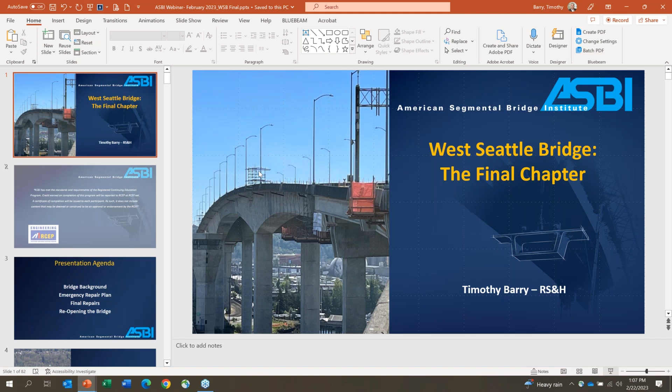Before I get started, this project, the West Seattle Bridge repair, I know has been talked about quite a bit inside ASBI over the last three or four years, with everything that's gone into this project and happened to the bridge. So the presentation today is really about telling the final story, how we were able to get the bridge reopened, and the efforts to get that accomplished.

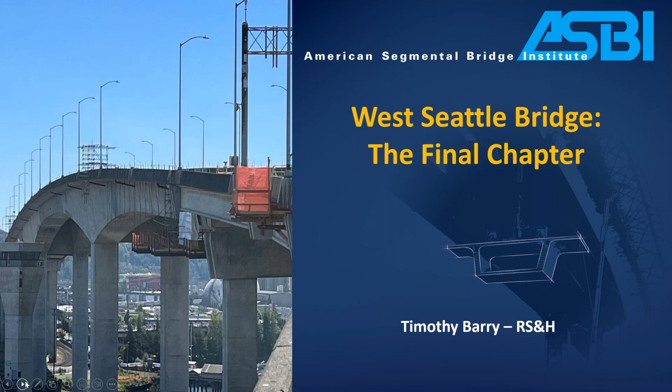Some of you might be new to the project and not know about it, so we're going to talk about the background of the bridge, what the initial emergency repair plan was when we first ran into difficulties, and then really focus on what I call the final repair project, which occurred basically most of last year, 2022, and how we were able to reopen the bridge.

A little bit of background: this is the West Seattle Bridge, opened in 1984. It crosses the Duwamish River in Seattle and connects the community of West Seattle, which is really the only connection of that community to the rest of the city. The bridge is owned by the Seattle Department of Transportation, and the three main spans, the ones we unfortunately had issues with, are cast-in-place balanced cantilever. The entire corridor is roughly 5,600 feet and carries 7 lanes, but we're going to focus only on the main span unit, the 3 spans in the center.

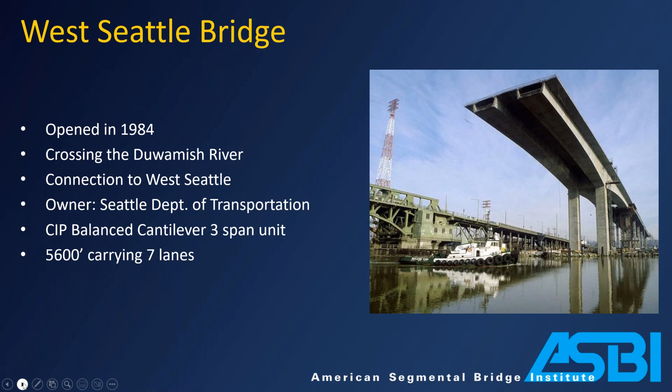I mentioned West Seattle—in this photo outlined in red is the community of West Seattle, with roughly 82,000 people, a significant portion of the city of Seattle. The dark red line is the West Seattle Bridge, basically the main connection point between that community and downtown Seattle and the rest of the city proper. This bridge is known as one of, if not the most, utilized pieces of infrastructure in the city of Seattle. It's important to commuters, businesses, and emergency services. When under operation, it carries 100,000 vehicles per day and 25,000 transit users per day—a very significant piece of infrastructure.

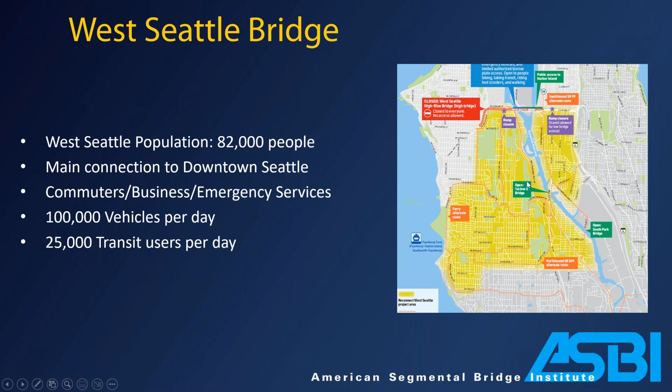This picture, though hard to see, shows the detours required when the bridge was shut down. Up at the top is where the bridge crossing is, and the next furthest south crossing of the Duwamish River is quite a ways away. What this doesn't illustrate is that this is a very much urban residential area—2-lane roads, on-street parking, a lot of traffic signals, and 25-mile-per-hour roadways—definitely not conducive for 100,000 vehicles per day. So the inconvenience to this community really cannot be overstated when the bridge is closed.

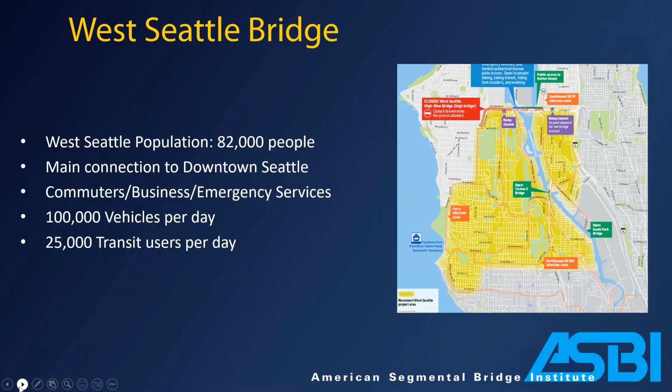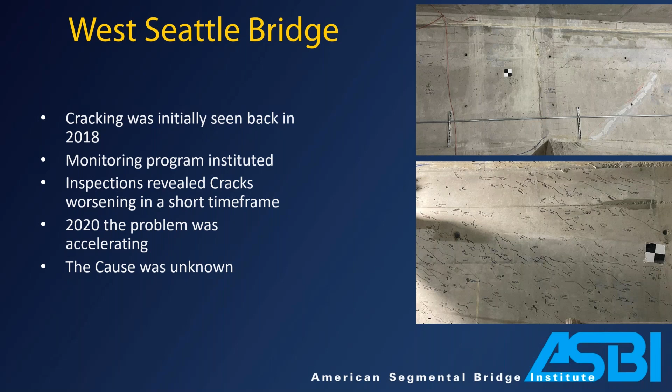So speaking of closing the bridge, what happened, how did we get to that point? Going back to 2018, some cracking was originally observed in the web walls and floors of the bridge. It wasn't overly concerning at first, but it was noted that it needed to be monitored more closely. As inspections progressed over the next couple of years, the cracks were getting worse, and worse over a shorter and shorter time frame. In 2020, it was noticed the problem was accelerating pretty significantly, and the alarming part was the cause was unknown.

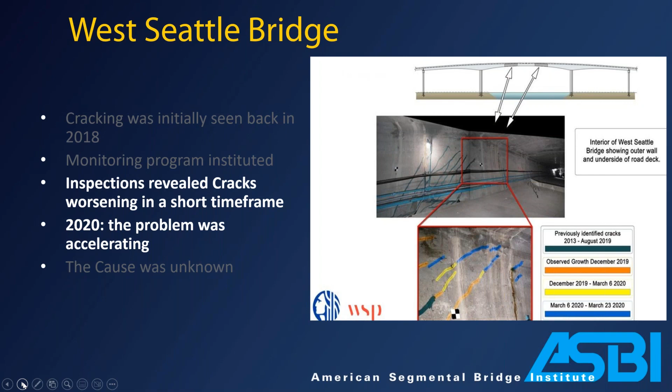This shows a good indication of the worsening in a short time frame. In green were cracks identified between 2013 and 2019. In orange, observed again in December 2019—only about 4 or 5 months later. In yellow, between December and March 6th, 2020—only 3 months. And in blue, between March 6th and March 23rd—less than 3 weeks, that's the additional cracking seen. This is when the alarms started going off that there was a serious problem needing further investigation. This is actually a memo from the engineers monitoring the bridge saying they couldn't model the cracking at the time they were seeing it.

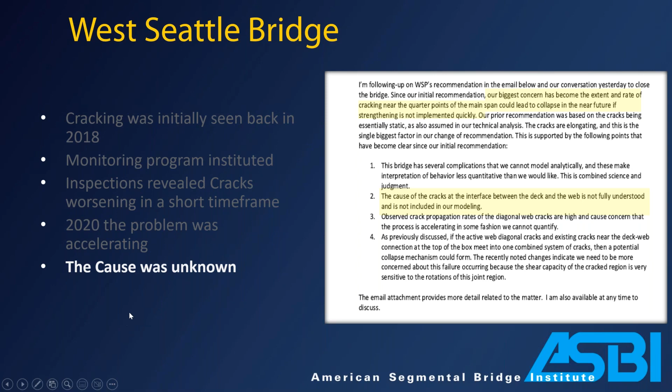Cracks were getting worse, exponentially worse, in a short period of time, and the cause couldn't be determined. So there really was no choice, they had to close the bridge for safety reasons. That happened on March 23rd, 2020. The bridge was closed, causing a major inconvenience to the city of Seattle.

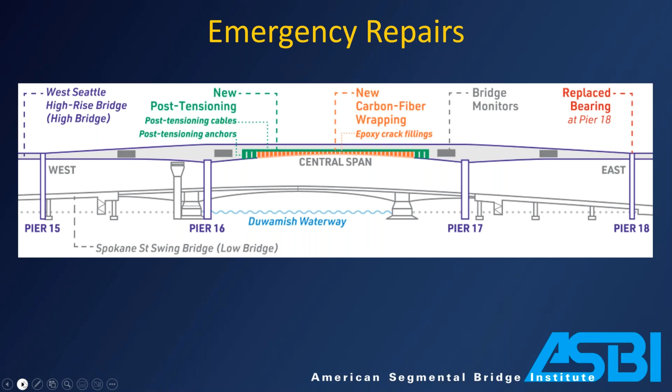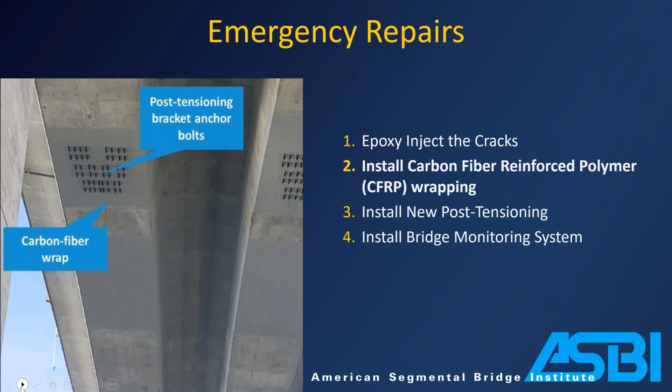The initial response after the closure was to do a very quick emergency repair, basically to stop the cracking and stabilize the structure after traffic had been removed. It was really three phases: install carbon fiber wrapping in the main span, install new post-tensioning, and do epoxy injection of some of the cracks, not all of them, but certainly some. These steel blocks were essentially the makeshift anchors they were able to install for the added post-tension.

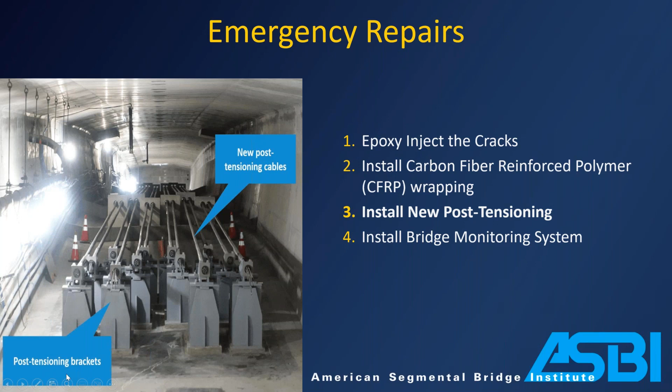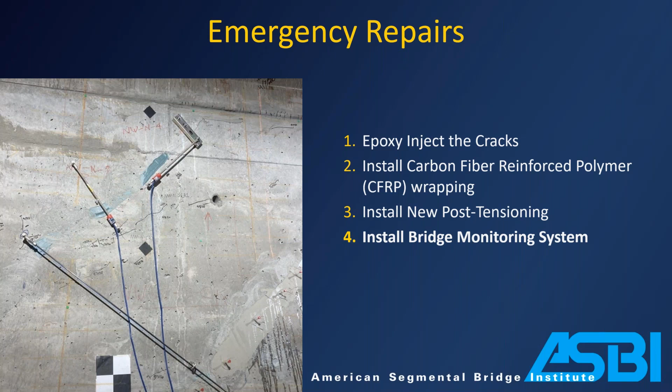A very important piece of the emergency repairs was installing this bridge monitoring system, a series of strain gauges, electronics, and even cameras, so they could monitor the bridge in real time and see what was going on. That was useful at the time, useful during the final repairs, and it'll remain in place for the rest of the bridge's life.

After the emergency repairs stabilized things, a decision needed to be made: is this bridge savable? Does it need to be repaired or replaced, or can it be repaired? A lot of thought went into this, and a panel of experts was assembled to look at it. Finally, after a lot of discussion and meetings, it was determined that yes, a repair could be developed and designed. That was the step forward for the Seattle Department of Transportation.

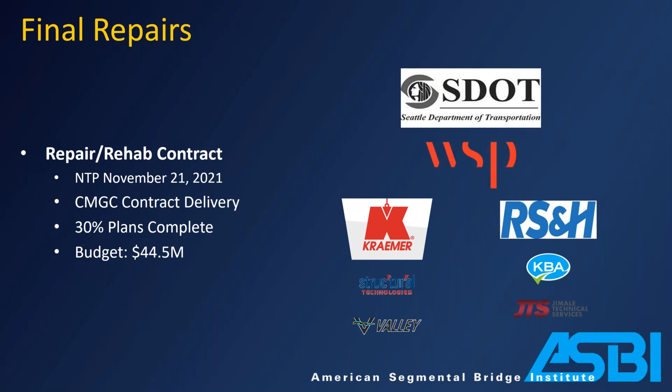NTP for the project was November 21st, 2021. The CMGC contractor was Kraemer North America, with two major subs, Structural Technologies and Valley Electric. The EOR already on board was WSP for SDOT. They also selected a construction management firm, RS&H, with subs KBA and JTS. At that time we had about 30% plans and a budget of roughly $45 million.

One thing recognized was that with a completely closed corridor needed to repair this bridge, there was an opportunity to do some maintenance as well. With the corridor closed and no traffic to deal with, they decided to do maintenance on the rest of the bridges, besides the segmental, which were also more than 40 years old and in need of attention.

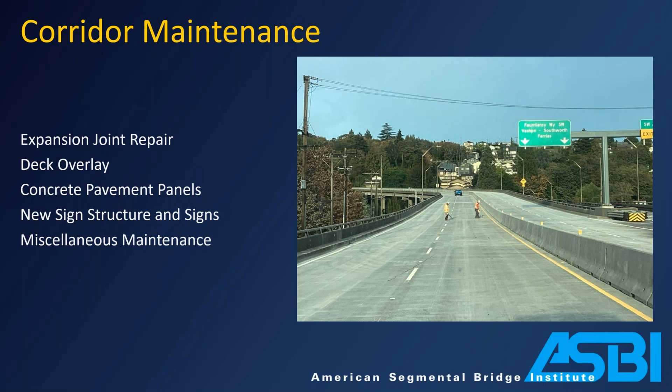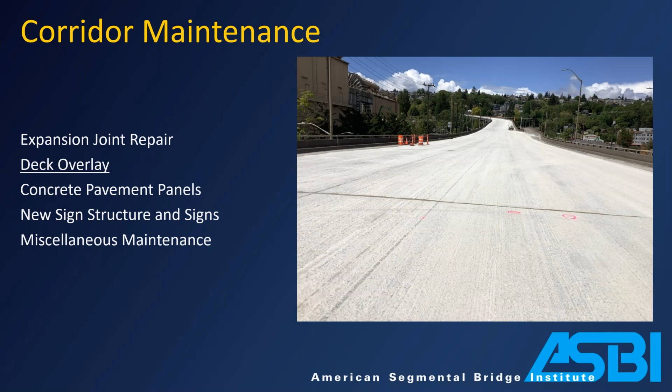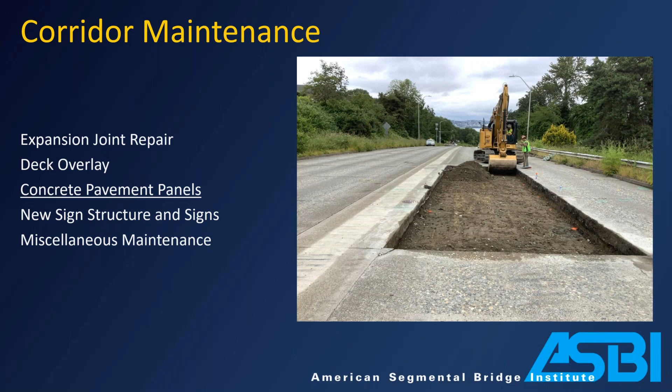They were able to repair some joints, all over the bridge, not just the segmental portion. They did a much-needed deck overlay on a good portion of the approach spans. On the far western side of the West Seattle side, there's concrete pavement, and they ended up replacing roughly 90 different panels. There were also new signs, new overhead sign structures, and a lot of miscellaneous maintenance, since this was a pretty unique situation—a corridor that hadn't been driven on for over a year, so a lot needed to be done to get it back into drivable condition.

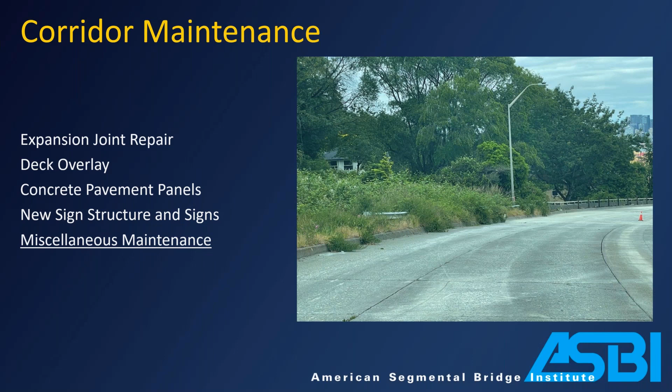Then, unfortunately though not a unique problem, it was discovered shortly after the corridor was closed that all of the copper wiring for the entire lighting system of the corridor had been stolen. They don't really know when it happened, but it was determined shortly after.

So this was something that obviously had to be added to the scope. They needed to rewire all the lighting on the bridge. Something else fun to deal with that I'm sure many people on this webinar have experienced.

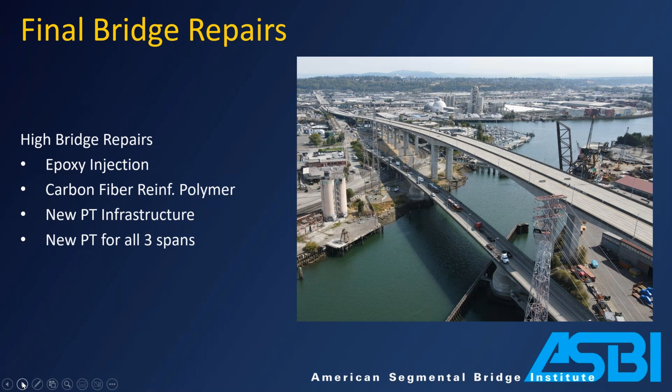So the final bridge repairs, as we enter into this, really broke down to three main parts of the scope, besides the maintenance that I mentioned. Number one, epoxy injection of the cracks. It would be impossible to epoxy inject all of them, so just a select number needed to be injected. Some carbon fiber reinforced polymer wrapping at strategic points of the structure, and new post-tensioning infrastructure, which we'll get into a lot more detail on a little bit later on.

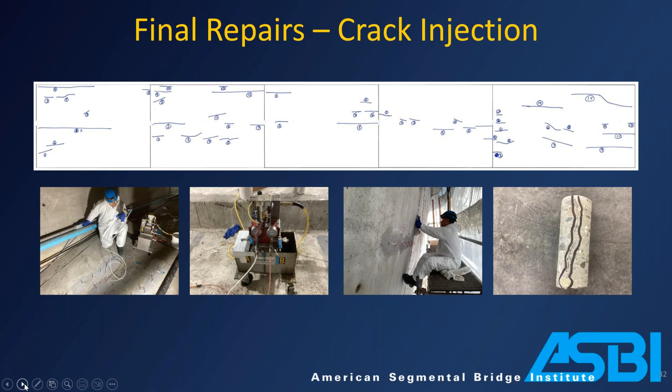For the crack injection, again, it'd be impossible to get all the cracks, so a process was set up where the EOR would come out and identify the cracks that should be injected, the ones most appropriate and most critical. They'd identify the cracks, and the contractor would come in behind and do the injection. It was really good teamwork among all the players involved to get this done quickly. All told, we ended up injecting roughly 13,000 linear feet of cracks in the structure.

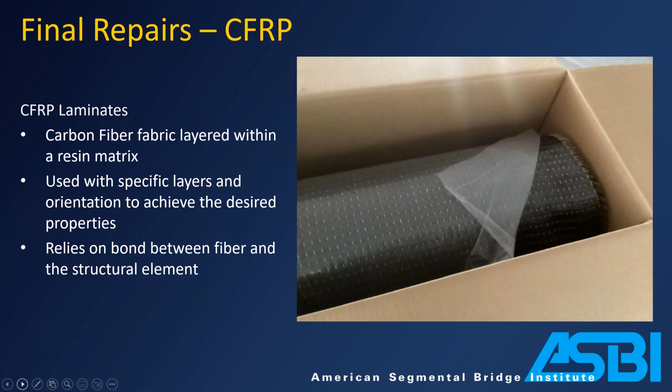For the carbon fiber, this again was a strategic use of this technology, using carbon fiber laminate. For those not familiar with it, it's really good material for repairs, for strategic points where you can bolster and increase the reinforcement of the structure itself.

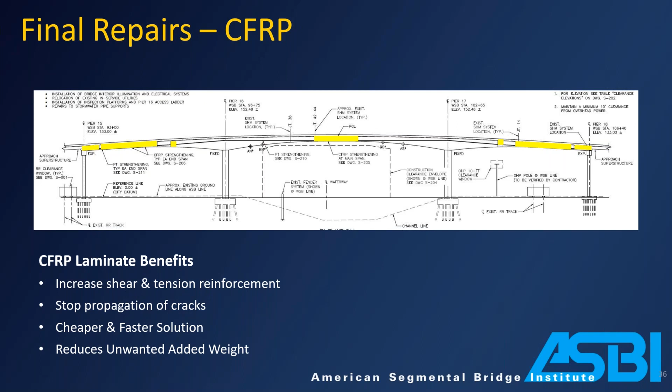There's a couple reasons why this was used. One, it's relatively easy to install - you don't need heavy equipment, and it's not really that difficult. Another thing is you got a lot of beneficial use out of this material without adding a lot of extra weight to the structure. We're already dealing with a structure having major structural problems, so using carbon fiber wrapping was a really good solution.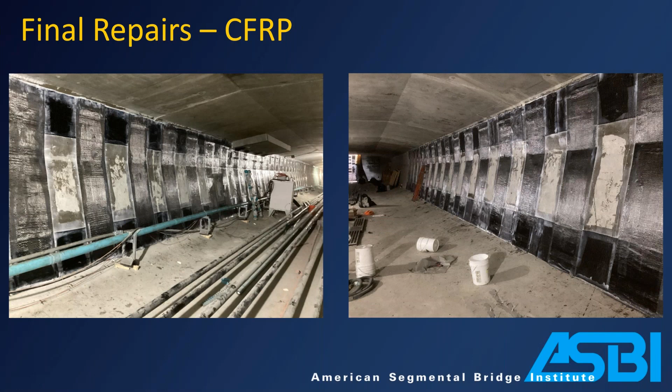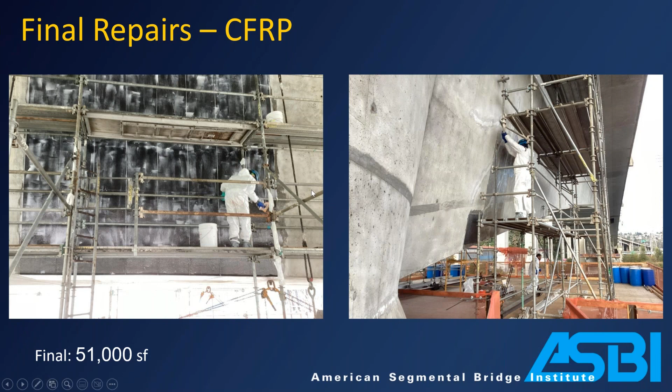You can see in these photos the application, obviously inside the bridge. You'll see the carbon fiber wrapping running in two directions, both horizontally along the web wall and vertically. Depending on how the fibers are oriented, it provides different force resistance and different applications. Here you can see it on the exterior of the bridge as well. All told, when we were complete, we had roughly 51,000 square feet of carbon fiber wrapping on this project.

As you can see from the pictures, and anybody who's ever seen this bridge knows, the biggest challenge for both the epoxy injection and the carbon fiber was access. This is an incredibly tall bridge. It crosses over a channel, it crosses over rail lines. Not very easy to access, especially since all exterior surfaces of the box had to have carbon fiber and epoxy injection done. So the solution the contractor came up with actually worked fantastic.

These inspection platforms were hung from the structure, and they were mobile as well. They had a pretty simple winch system set up on top of the deck, and they were able to move these platforms up and down the entire span to wherever they needed to go.

That was really important because of the locations of the cracking and carbon fiber - you had to be able to move quickly, but also have a crew work relatively efficiently. Just using a bucket truck would be fine, but you'd constantly be moving it, you can only get 2 people in it max, you don't have room to work, and it would be a lot of extra steps. With this, you can put the entire crew, all their equipment, and everything on the platform, and it's mobile.

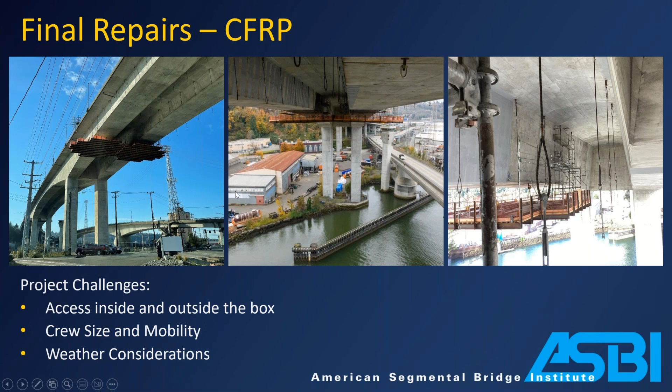Another thing is weather considerations. Anybody who's spent time in Seattle in the late winter and fall knows weather is always a problem - you're always going to have rain and cooler temperatures. With these inspection platforms, they were able to encase them with plastic, and through the use of heaters, had perfectly viable working conditions inside the structure so the entire crew could work with all their equipment, maintaining environmental conditions necessary for the application. This was a great use of these inspection platforms to accomplish this work.

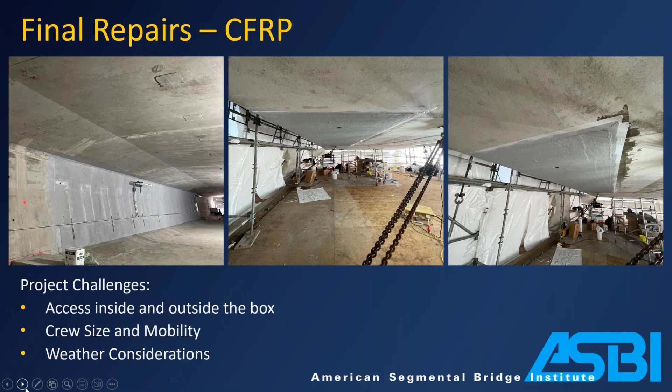Anybody who's ever done any sort of bridge rehab or repair job knows that as soon as you get in there, you really just don't know what you're going to have until you start opening things up. The plan is great and everything can be planned out as best you can, but until you get in there and see what you're dealing with, you just don't know.

In this bridge in particular, because of some of the difficulties we faced installing this post-tensioning, we had to core the existing structure. There were 32 locations where we had to do 17-foot long, 6-inch cores to install these tendons, and 8 locations where we had to do 6-foot long, 6-inch cores. So that alone is incredibly difficult to accomplish.

This is, again, an existing structure. We had to core through diaphragm walls that had reinforcing steel and existing post-tensioning from the original design. And of course, nothing is where it's supposed to be according to the original plans. So it was a constant battle trying to find where we could actually get this core in to do the minimal amount of damage to the existing structure.

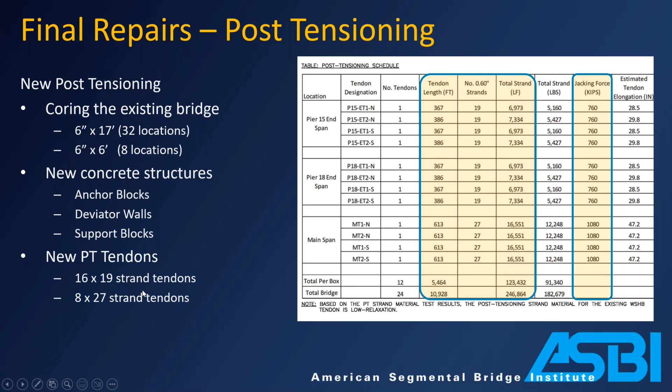So with the coring, those of us involved with post-tensioning know that the location of the anchor and the path of the tendons is incredibly important. That's what provides the forces you need for the design. So where these cores were located was incredibly important. As per the original design, we had an exact location where these cores needed to be.

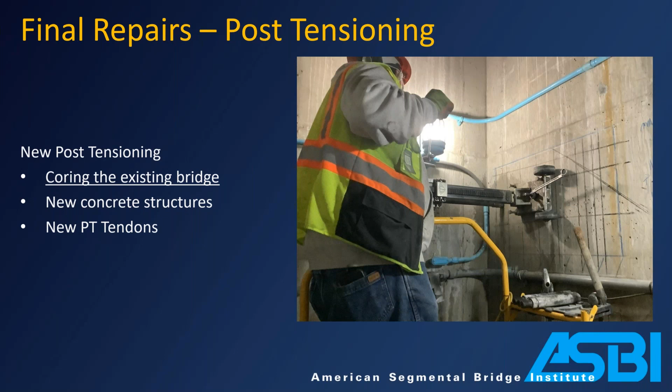However, the first step of coring was a GPR scan. We had to get in there and GPR scan where these cores were going to go, to avoid as much of the existing reinforcing steel as we could, and avoid all of the existing post-tensioning. What we found is where the cores were supposed to be wasn't going to work. There were too many things in the way.

So then the core location would have to move. And of course, once you move that location, your anchor head moves slightly, your path might be a little different. So every time you change just a little bit of the core location, it's going to affect that entire tendon, and affect the anchor on the other side. So you end up chasing your tail a little bit - we need to move it here, well what does that do to the other side, if we move it back over here then it moves this. This was a very tedious, iterative process to get completed.

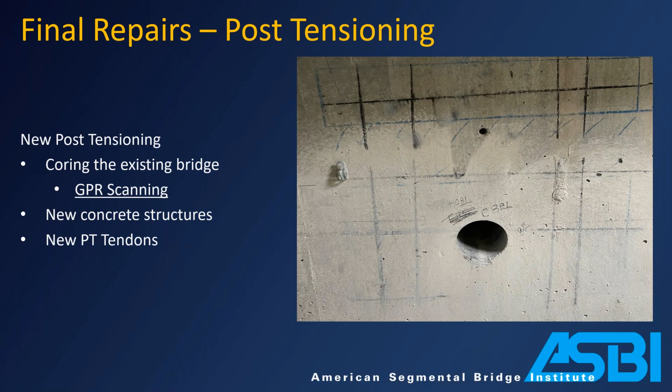So the next step after the GPR scanning was to do the cores themselves. I will say the contractor did a great job maintaining the location within a pretty tight tolerance. A 17-foot long, 6-inch core is pretty difficult to achieve, and to make sure you stay within an inch or so tolerance to keep it in the right place. This is an example of one of the cores from the plans - 17 feet long - and like I said, the contractor did a great job.

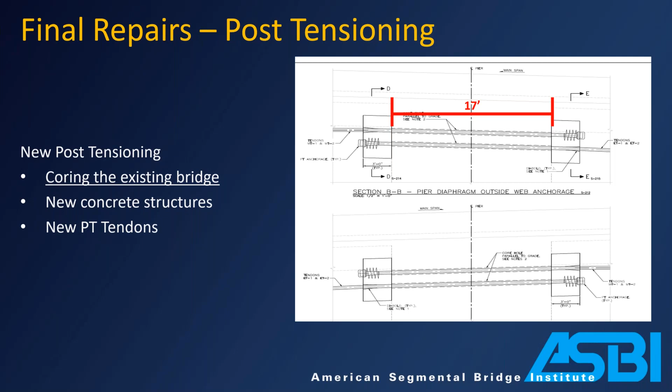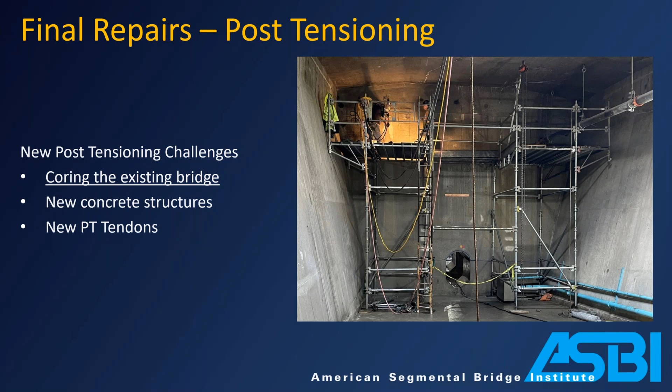I also forgot to mention that the majority of these cores occurred at the top of the diaphragm walls, roughly 20 feet off the surface inside the bridge. So that made it that much more difficult for access, and that much more difficult to accomplish being up on scaffolding 20 feet in the air inside a box with limited accessibility.

With the concrete infrastructure for these tendons, a lot of different challenges presented itself. Because you're inside the box, you have no heavy equipment, no real equipment of any kind. Everything had to be hauled in by hand, moved around by hand, and built by hand. An incredible amount of reinforcing steel, all the formwork, had to be carried down, lowered into the box, and moved around by hand. Pretty difficult to achieve. The theme you're going to hear me say more and more throughout this presentation is time was a huge factor for this entire project. Getting the bridge reopened was the number one goal in everybody's mind, so time was constantly and continually a factor.

So building these, this is a picture of the deviator walls. Just for reference, anytime the tendon path deviates for these external tendons, you have to have this internal concrete structure that carries that load and carries those forces. These are incredibly important, and they have a lot of force acting on them when those tendons become stressed. This has to be done correctly. You don't have any room for problems, for honeycombs, for voids. This concrete has to be placed incredibly well. As you can see from the photo, they go all the way to the top, and it doesn't look like there's any way to get concrete in there.

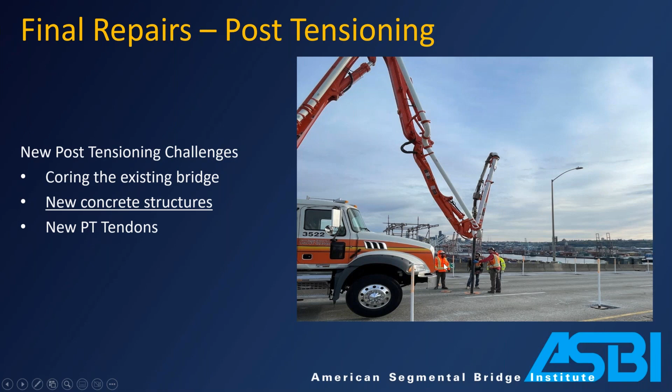Actually, pouring the concrete was difficult as well, because the only way to do it - you can see it right here - there is a little hole in the ceiling, and that was the only access available to get the concrete into the structure. So proper vibration and consolidation of concrete was a major concern with pouring a structure like this with the limited accessibility we had. Here you can see how we actually did it. The concrete pump was able to stick the pump hose down through the hole and fill the formwork best they could.

One of the things they did with the forming system is they put in windows at a lower location and upper location. This allowed accessibility from the vibrator to make sure these walls were poured properly and didn't have any of the void or consolidation issues we feared. And I must say, they turned out fantastic. Contractors did a great job - really, really good quality concrete. No issues at all with these deviator walls. They turned out great, as you can see from the photos.

I also forgot to mention, what you see above here is actually a drainage line running through the deviator wall. The tendons are the two ducts you see right below, and then you also have other utilities that dance around. So all kinds of stuff had to be worked around to get this infrastructure installed.

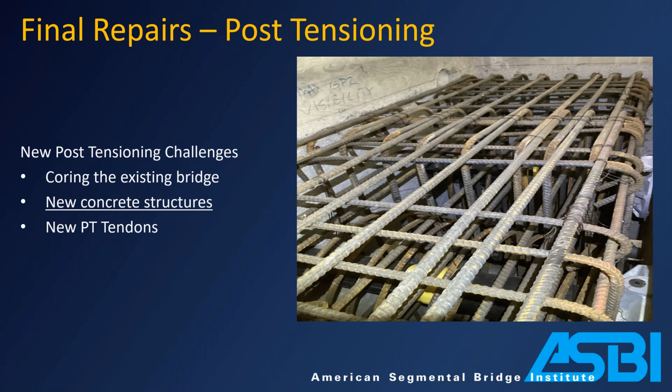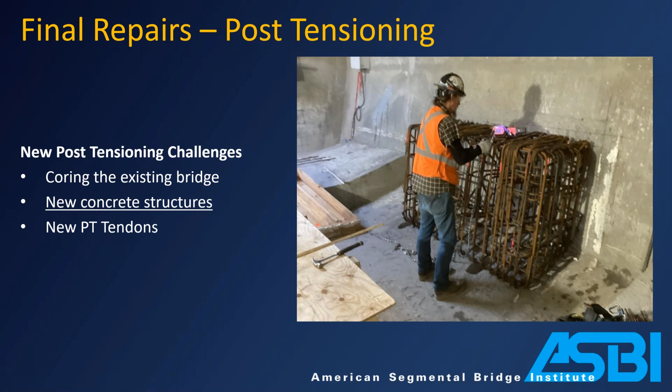Besides the deviator walls, another really important part was the anchor blocks. We're installing brand new tendons inside an existing structure that carry an immense amount of force. You can't just slap a tendon inside there or install an anchor block to the side of the wall to carry that much force - these were pretty significant structures. This is one of the smaller tendons, one of the anchor locations at the end span, and you can see the amount of reinforcing steel, pretty incredible. Again, we're dealing with this inside the box with no equipment really to use whatsoever. But they had to be doweled in, of course, to the existing structure to provide some sort of anchoring to the bridge.

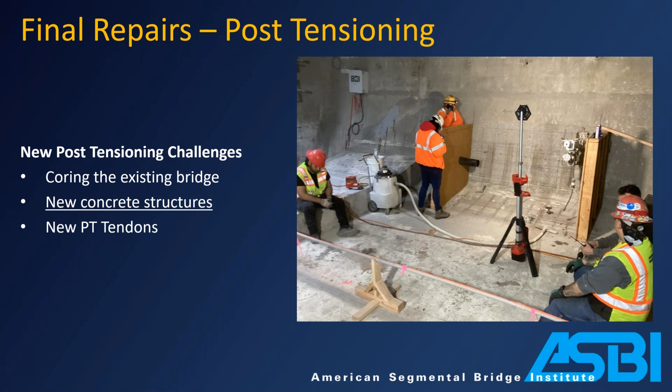So now we're back to GPR scanning once again, trying to avoid all the reinforcing steel and everything else inside that wall. The intended location of all those dowels - there's no chance they were all going to fit properly with the existing reinforcing steel. So we had to move a lot of stuff around, had to adjust on the fly to get it all to fit. And just doweling in wasn't enough - with the jacking force for these tendons at around 700 kips, that's a lot of force that has to be carried. Just putting this block and attaching it to the wall wasn't enough resistance.

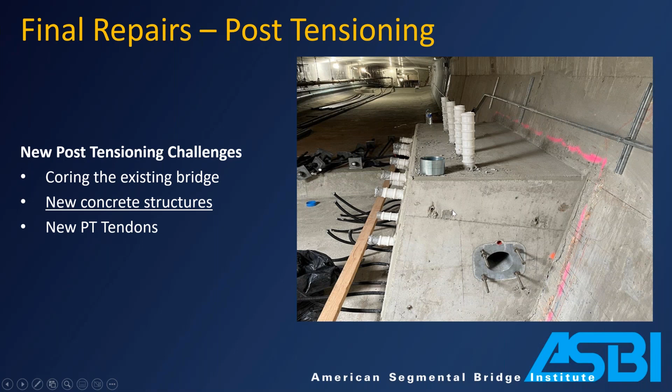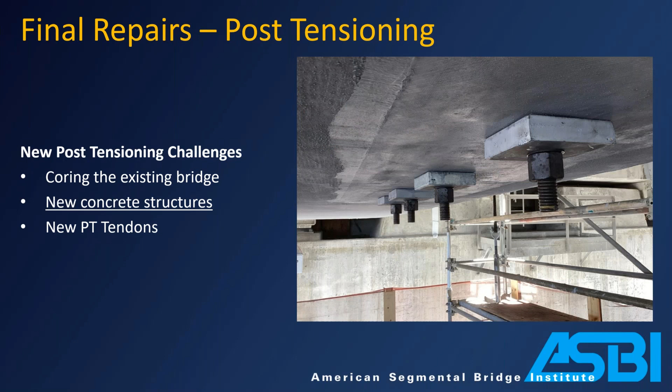So what you see in these blockouts were vertical and horizontal post-tension bars that had to be stressed to help further attach these blocks to the existing structure. Those bars daylighted out to the exterior, so it had to be cored all the way through the web wall and through the bottom slab to provide that resistance so these anchor blocks could do their job.

So a lot of effort had to be done before we even thought about doing any of the actual brand new post-tensioning, to build the infrastructure first and then be able to stress the tendon. And the tendon stressing itself was a challenge in its own right.

As I mentioned before, no heavy equipment of any kind was allowed inside or on top of the bridge. Because of the structural problems, there was a rule that nothing over 10,000 pound gross vehicle weight could cross over the main span. So we couldn't have cranes or heavy pieces of equipment to move around the jack. The decision was made by the contractor to stress these tendons with a monostrand jack.

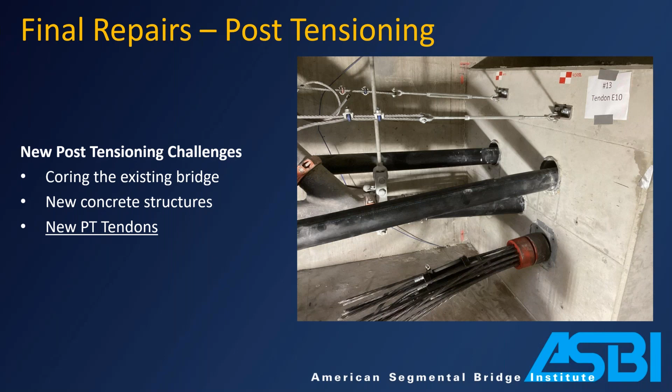So because this project wasn't challenging enough, we ran into a few other issues trying to get this project done. For timeline, construction started basically in January of 2022. We had NTP in November, but by the time the design progressed and they were ready to go, it was January 2022. We were still in the late stages of COVID impacts, of course.

We had a couple times where workers or crew members tested positive, so we had people out and had to deal with that. One major issue we ran into is in the city of Seattle - starting long before we began our construction - there was a citywide ongoing Teamster strike by the concrete truck drivers. Up until about May of 2022, we could not get any concrete delivered to the project. And this was not just us.

This is citywide, this is everywhere in the city of Seattle. So this was something that was always hanging over our head as we were progressing.

The initial stage of the project was the epoxy injection and the carbon fiber, but there was a time where we knew we would eventually need to place concrete. It would have been nice to do some of the maintenance work early on, maybe some of the overlay, but since we couldn't get concrete, none of that work could be done. As we got closer to basically our drop dead date of where the project was really going to be in peril, the contractor did a really good job of mitigating these delays.

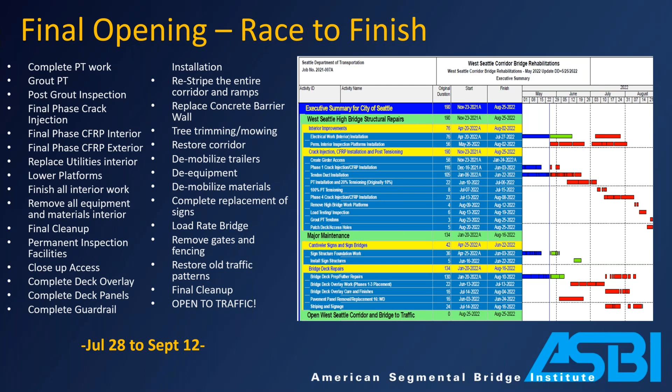Obviously this list is incredibly long, and often in construction, when we have a lot of work that needs to be done and we need to compress a schedule, there are certain things you can do. You can increase your manpower, or try to do simultaneous operations. But with the nature of this project, we couldn't do a lot of that, because this was such a linear scope and such a linear list of activities. Everything had to be done in order, and we couldn't do a lot of operations simultaneously. I'll explain what I mean by that.

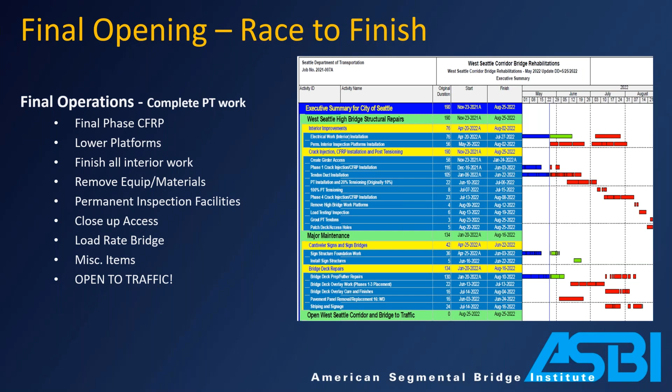These are the final operations that needed to be done after the PT work was completed. It was actually dictated in the design that there was another phase of epoxy injection and carbon fiber wrapping that couldn't be done until the post-tensioning was done, for structural reasons. The PT had to be done first, and then what we called phase 4 of the epoxy injection and carbon fiber. The subcontractor just had to sit and wait until the PT was done, and then once it was done, they could go and get back to work.

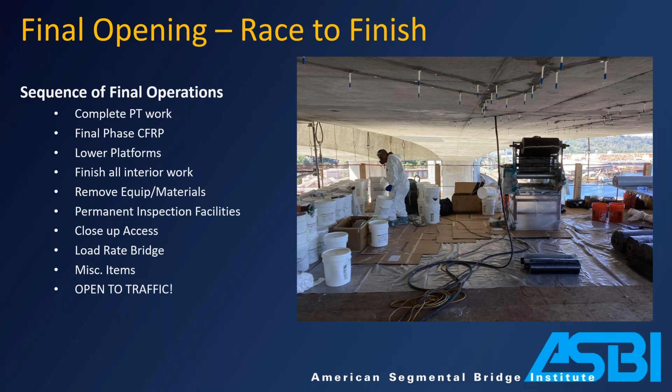So we had the final phase of the CFRP, and because they were using these platforms for this work, much of which was on the exterior of the bridge, those platforms couldn't be lowered. That was a significant part of the project, getting those platforms lowered and out of the way. That work had to wait until finally the CFRP and the epoxy injection was complete, so we could finally remove the platforms and finish all the interior work.

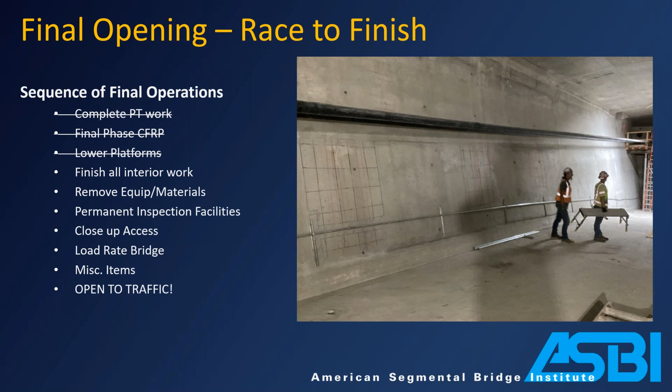This is a lot more significant than it sounds. There had been work ongoing inside this bridge for basically two years at this point, so there was an unbelievable amount of equipment and materials, everything you can think of, down inside that box. Well, it all had to be removed and cleaned out of there. This was a pretty monumental effort that needed to be started.

I showed pictures of these before. This was the pretty extensive scaffolding system so that they could do all that work up top, install the post-tensioning, do the grouting. The grouting to post-tensioning had to be complete before we could remove the scaffolding system, all the forming materials, everything. Everything had to be taken out of the bridge through a couple of access holes you see at the very top of this photo. That was the access we had. There were three of those per bridge, per box. That was the only way to get material in and out of the bridge.

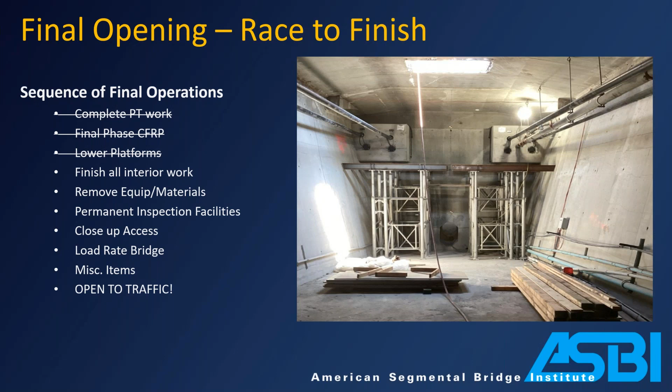It could only be lowered in and out with the forklift. We didn't have a crane or a boom truck or anything like that. It was all done with forklift and by people carrying things up and down ladders to get out of the bridge. So the limited accessibility really made things difficult, including the cleanup, which is something you'd think of as an afterthought. But there was a lot of cleanup, and getting these large materials out of there was pretty difficult.

Then there was another part of the scope that was a great idea, installation of these inspection platforms. Because this bridge is going to be inspected heavily for the remainder of its life, and because of the sheer size of the box inside, these inspection platforms were developed to give maintenance and inspection folks access to the web walls and everything. It's a great idea, but it all had to be installed prior to opening of the bridge, and I'll explain why in a second.

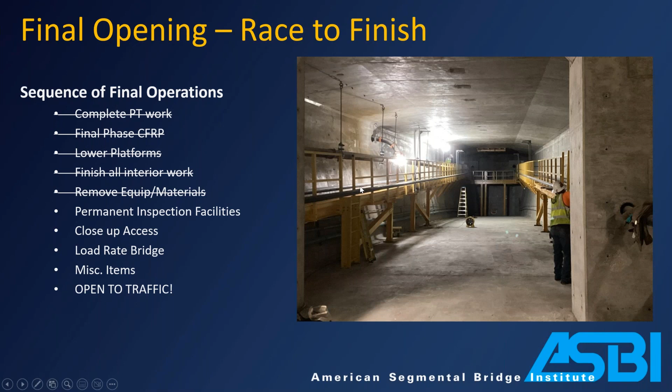It all had to be attached to the web walls, so we're back to doing GPR scanning and then finding areas where this material could be attached. It all had to be installed after the post-tensioning was complete, after the grouting was complete, after the scaffolding was moved out of the way, and the majority of the equipment and materials were cleaned out of the bridge.

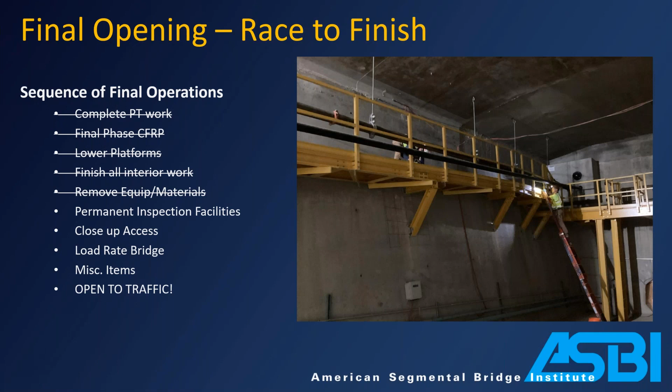And then these access holes that I showed in that previous photo were obviously temporary, so they had to be closed back up. They were all inside the travel ways, inside the lanes of traffic, so they had to be repaired and closed up.

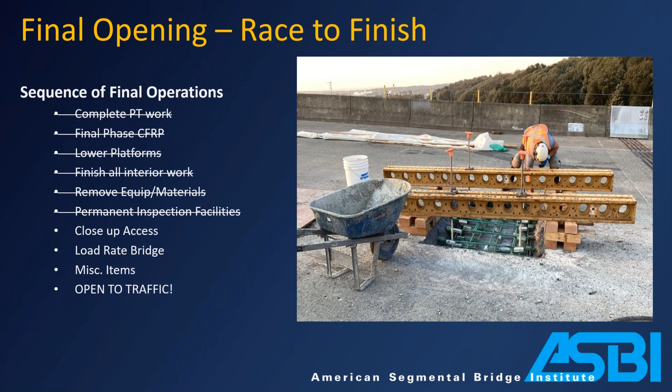And why this was significant, and why closing up these access hatches had to be done at the very last minute, is because of the height of this bridge. Once those temporary access hatches that were opened up only for this project and only for the repair were closed up, the only access inside the bridge was through manholes.

There are 2 of these in each of the twin structures. So any type of large equipment, anything long, this was the only way in and out of the bridge. So basically, when we closed up those temporary hatches, everything that needed to be in the bridge better be in the bridge, and anything that needed to be out of the bridge had to be out, because this was very, very inaccessible.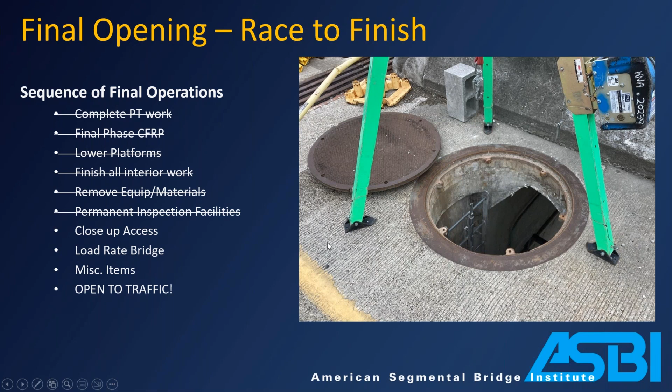You can see where it lies in relation to the yellow line there. So basically, to access this, you need a lane closure to be able to do it safely, and you're just not getting anything large or difficult in and out. So that's why one of the very last things we did was close up those temporary access hatches, to make sure we got all the equipment in and out that needed to be done.

I also mentioned before how great those inspection platforms were, and they were essential to getting the project done. However, each one of those hanging bars that the inspection platforms hung from daylighted out the top of the deck, and these little squares show the location of every one of those hanging bars. So again, all of these needed to be repaired.

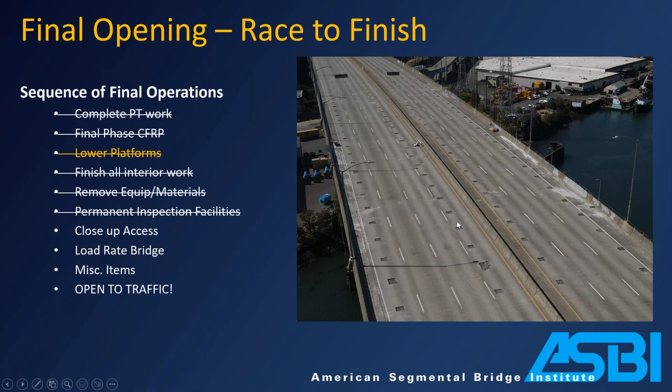You can see they fall perfectly right inside the wheel paths of some of the lanes. So this was a pretty big effort to repair all these before the bridge could be open. And again, it couldn't be done early. We couldn't start doing it until the inspection platforms were lowered.

And then a pretty significant part of this entire project was the physical load rating of the bridge that we did. This was going to be the final determination of whether or not this bridge would actually be reopened to the public. With the post-tensioning and all the work complete, and of course the bridge monitoring system in place, there was a process to physically load rate the bridge, and it wasn't just static loading—it was also dynamic loading.

We actually had 3 different scenarios, 3 different speeds, where they ran these loaded dump trucks across the structure, and then monitored the bridge to see how it reacted. This report would be the final determination of whether the bridge would be reopened.

Just to give you an idea, again, a timeline: we were now targeting basically Saturday, September 17th for opening of the bridge, still within our 1 week window of the 12th. So we were pretty happy that we still made that, what we said, the week of the 12th.

This load rating was done the Tuesday before, and that's how close we were cutting it. That load rating was going to get done, the report processed, and then SDOT would make the final decision basically that Thursday before, on whether this bridge could be reopened or not. So it was down to the wire.

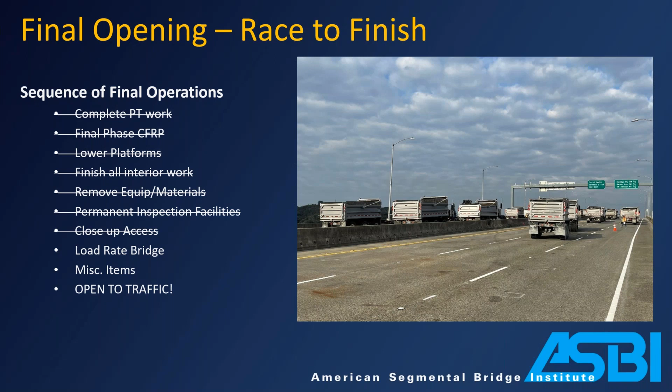And so all the work had to be done. Everything on the surface of the bridge had to be done, with the exception of final cleanup and some final striping, etc. And I'm happy to report that the load rating was an incredible success.

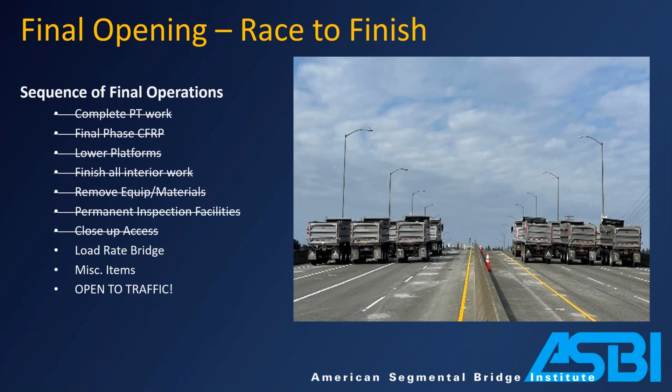It actually performed better than they had modeled, better than they anticipated. So it was clear that when the load rating was complete and the report was finalized, the repair work had done its job, and it was an incredible success.

Just as an aside, for you bridge nerds out there who love your bridge history, the load rating of the bridge—it was reminded to me by one of my colleagues when I mentioned what we were doing.

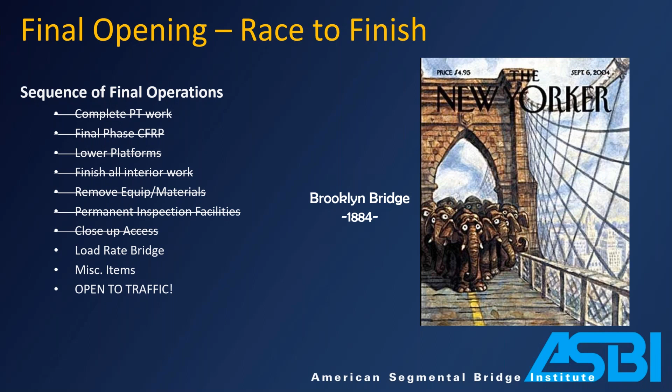They said to me, 'just like the Brooklyn Bridge and the elephants,' and my initial response was, what are you talking about? I actually looked it up. It's a true story that when the Brooklyn Bridge opened in New York, people had a lot of consternation about its structural safety, and a lot of people weren't using it. So in part as a stunt and in part in response to people's reluctance, I think it was P.T. Barnum who brought his team of elephants and marched them across the bridge to prove to the people of New York it was safe to use. In a weird scenario we did the same thing, but with the absence of elephants we used loaded trucks instead. It's a funny story that actually happened in 1884 on the Brooklyn Bridge.

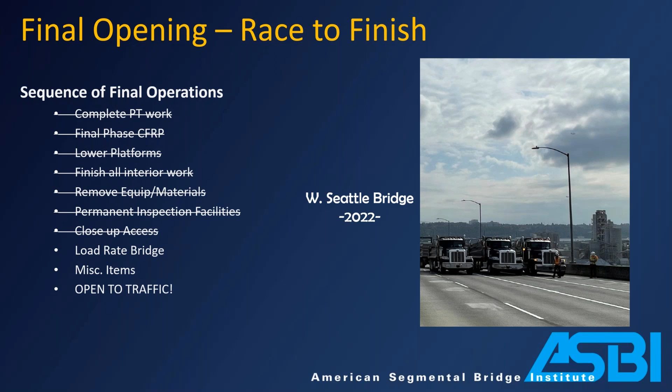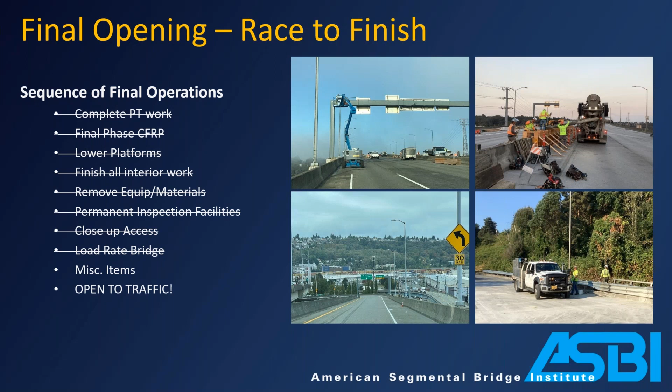Once we finally had the go-ahead and the bridge was load rated and deemed safe to use, there was still final touch-up work. We were down to hours before opening. We had to make sure all the signs were in place, close up temporary barrier wall that had been opened, restripe the whole structure, and do routine maintenance like new guardrail. There was tree trimming on the overgrown corridor. SDOT mobilized crews for cleanup - for about a week straight there were vacuum trucks and water trucks cleaning out the bridge, because over 2 years of construction work meant tools and debris had to be cleaned up to make the corridor usable again. Teams of people walked every square inch of the structure, every off ramp and on ramp, to make sure it was safe and clean and ready to go.

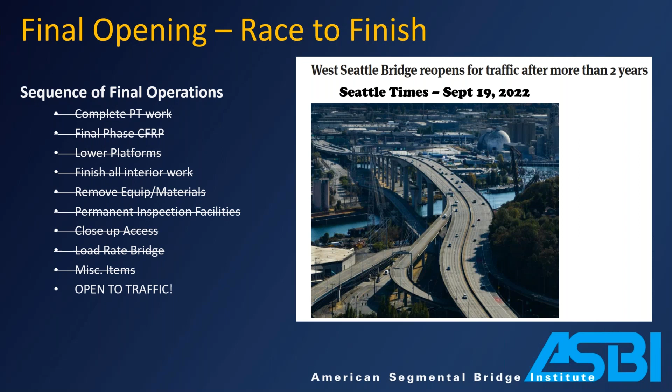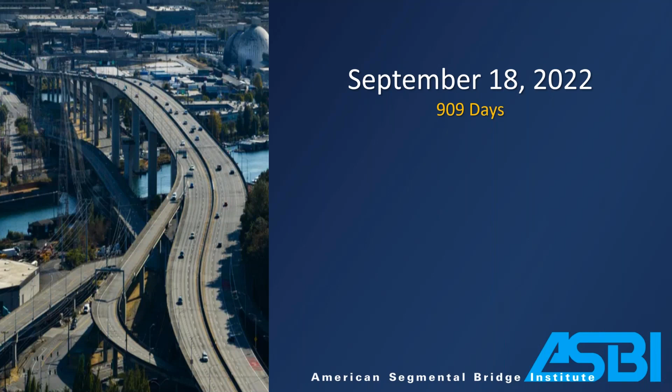This was from the Seattle Times front page on September 19th, but we actually reopened the bridge on September 18th, 2022, after what turned out to be 909 days that this structure was closed. That's obviously a pretty significant accomplishment for the people involved with the project, and also for the city of Seattle.

Just to give you an idea of what we did and how we did it: there was 13,000 linear feet of crack injection, 51,000 square feet of CFRP wrapping, 250,000 linear feet of post-tension strand installed, stressed, and grouted, plus all that maintenance work throughout the entire corridor - approximately $40 million of work in less than 9 months. That's a pretty incredible feat to be able to accomplish.

I want to mention the people who made that happen. SDOT's team of design people, construction people, maintenance people - the effort that went into reviewing submittals and putting the contractor in a position to succeed was a big deal. The basic rule of thumb for any submittal on the entire project, whether material or otherwise, was it had to be turned around and approved within 2 days - we're talking days and hours, not weeks or months. It was not uncommon to get contractors submitting things at 9 o'clock on a Saturday night or 2 a.m. on a Sunday morning. It didn't matter - it was whatever it took to get the job done. SDOT's team was amazing, and Kraemer's crew did really good work.

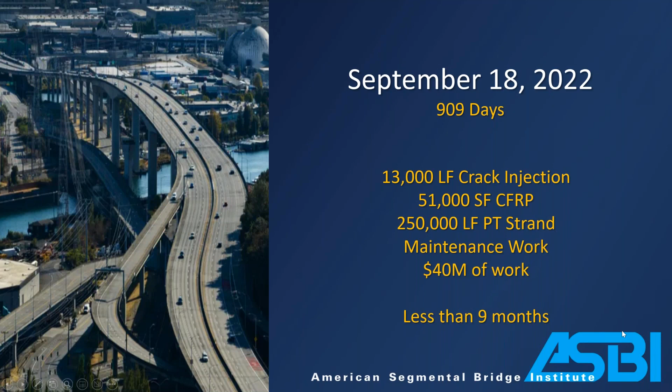So Wade, back to you. Great presentation, Tim, thank you very much. We've got a number of questions, and a little bit of time to go through those. Okay.

There are several questions here that are all asking the same thing, and I know you were leading the construction management team, but could you talk a little bit about the source of the cracking? What was determined to be the source or cause of the distress in the bridge?

I'll try to summarize this again. I'll preface this—I'm not a design engineer, and I was not involved with the design of the repair. But it essentially boils down to this: the bridge was designed in the late 70s, built in the late 70s, early 80s, and the original design just didn't quite accommodate its needs. It probably didn't take into account the type of loads we see nowadays.

I hate to say it was designed incorrectly, but I think that's basically what it was. The existing post-tensioning, especially in that main span, just wasn't sufficient enough throughout the life of the bridge—through the long-term creep and shrinkage. I think the tendons experienced some relaxing over time, and it just wasn't designed up to the standards we see nowadays. That's really what it boiled down to.